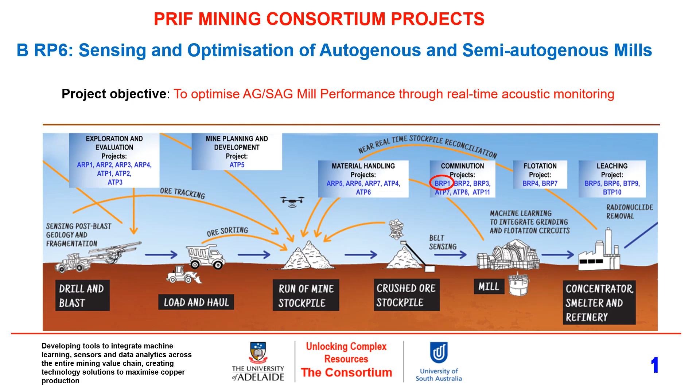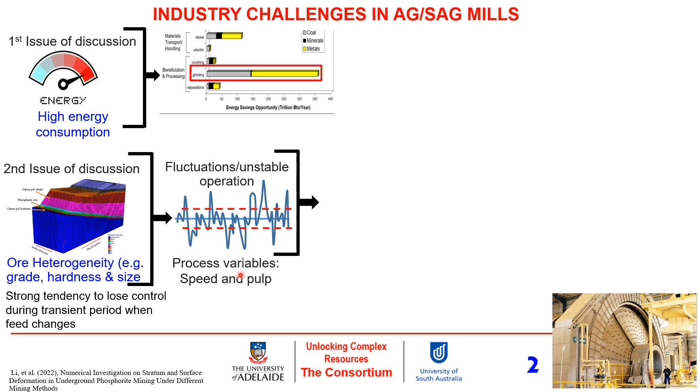The high energy consumption in grinding is usually linked to the feed ore that goes into the mill, which is usually heterogeneous in grade, hardness, and size as we mine deeper. The feed ore heterogeneity, especially hardness and size distribution, can cause high fluctuations and unstable plant operation, also affecting other process variables such as mill speed and percentage solid loadings. In effect, there is a strong tendency for mill operators to lose control during the transient period when the feed ore changes in hardness and size distribution.

Again, owing to the hostile and harsh operating conditions of autogenous and semi-autogenous mills, it is practically very difficult, if not impossible, to measure, understand, and control the mill's internal events online. And that has been the major challenge when it comes to monitoring grinding mills such as autogenous or semi-autogenous mills. As the saying goes, if you cannot measure, then you cannot control.

Now, the big question is how to monitor feed ore heterogeneity, in terms of hardness and size distribution. How can we measure that? Or how can we monitor that in real time to reduce the fluctuation that it is likely to cause and provide less varied operation or more consistent processing of the ore inside the mill? Again, another question

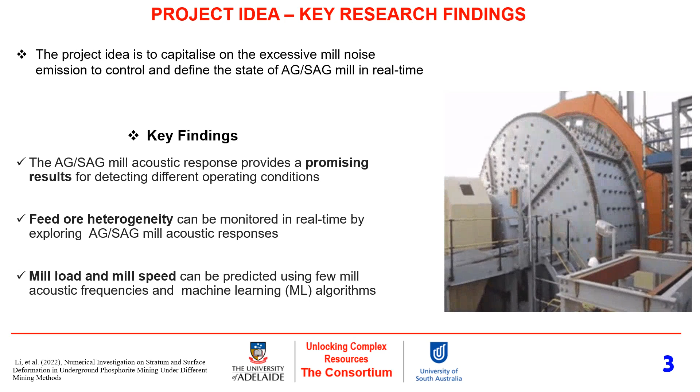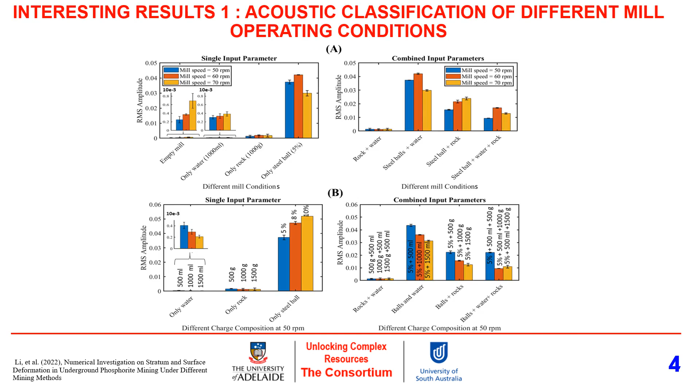Another interesting result is a result showing two ore hardnesses, that is model quartz and iron ore, in the ball mill grinding circuit and their acoustic emissions. Now, from these results, you can see that the energy in the acoustic signal for the model quartz grind characteristics is relatively higher as compared to that of the iron ore grind characteristics.

And from a preliminary study, it was realized that the model quartz happens to be far harder than the iron ore. And it means that hard materials interact inside the mill to produce higher energy in terms of acoustic emissions than the relatively soft material grind characteristics inside the mill.

Again, the acoustic emission of these two rock materials reflected very well their size breakage characteristics inside the mill, such that you can clearly see that once the feed size decreases, the mill acoustic emission also reduces. And this can be attributed to the fact that it's a wet grinding process.

So you break the material, the rheology, the viscosity of the ore begins to change, and it starts forming a coat or lining around the balls or the inner surface of the mill, and then it tends to dampen the effect of the ball to ball and ball to liner or lifter interactions, reducing the mill noise gradually.

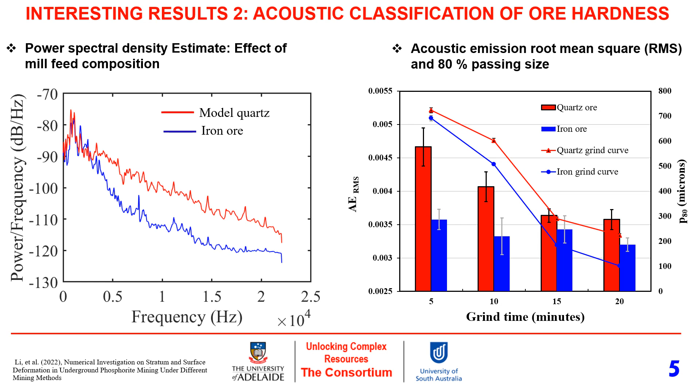Now, from our research, some of the benefits to the industry that we want to discuss. This research is going to provide real-time monitoring of impossible or difficult to measure parameters inside the mill, as it has been established that because of the harsh conditions, you are not able to see inside the mill. It's very difficult to have sensors to monitor the in-mill events in real time.

Also, this study will help to improve the control of autogenous and semi-autogenous mill disturbances by providing consistent feed ore processing and predictability for proactive actions. And finally, to improve the overall performance of autogenous and semi-autogenous mills, such as the energy consumption, which has been proven to be very, very high relative to all other unit processes on plants.

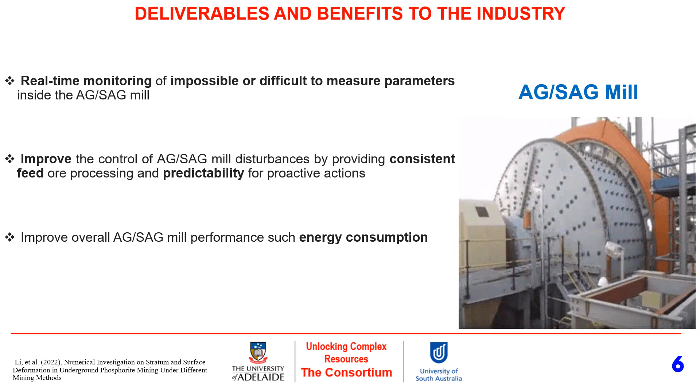Some future work that we would like to talk about. The first one is, from the promising results that we've obtained from the laboratory-based experiments, the acoustic sensing technology should be expanded to large-scale autogenous and semi-autogenous mills to see if the trends we are getting from the laboratory are the same as those at the industrial level.

Also, as the mill acoustic emission produces a large frequency spectrum, a few frequencies should be determined to correlate with critical process variables like the mill speed and acoustics, the solid loadings and acoustics, pulp density and acoustics, or heterogeneity in terms of hardness and acoustics, and many more.

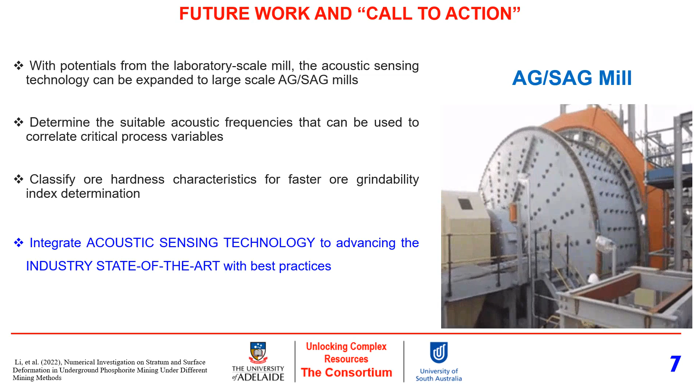Again, as ore grindability tests such as the Bond work index test and SAG power tests are usually laborious and time consuming, acoustic sensing can be exploited to classify different ore hardness for faster ore grindability index determination. And finally, the study is calling for action to integrate acoustic sensing technology in the grinding circuit to advance the industry state of the art in real time.

As part of this project, we've been able to publish 2 papers in Minerals Engineering, and we also have a couple of peer-reviewed conference publications.